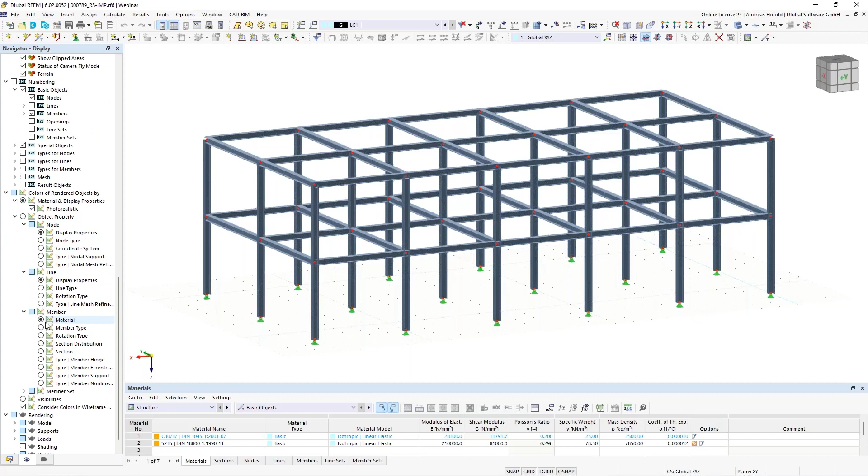I can show you the navigator display. You can use different settings here, for example members according to member type, section, and so on, and you can see there's the same color for all the same cross sections.

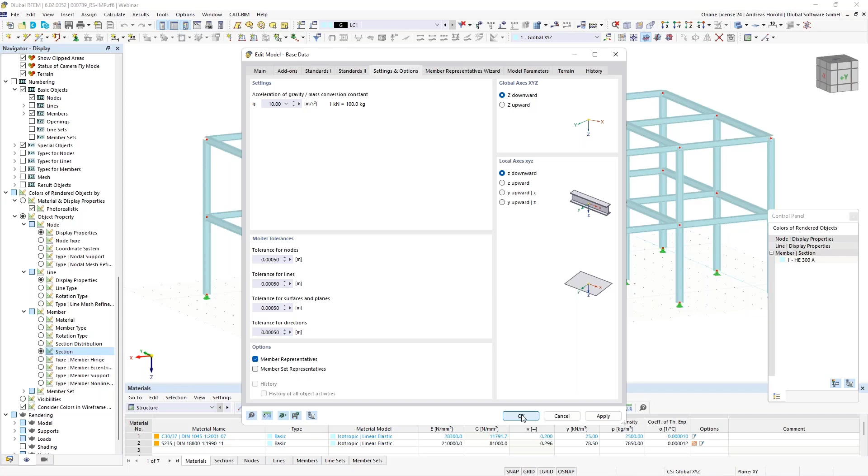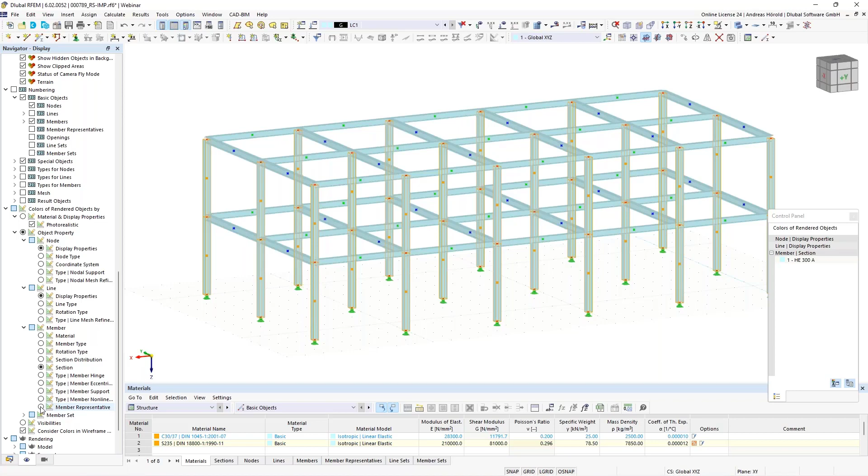I would like to show you two possibilities to display the columns and longitudinal beams and so on with different colors. First, I start here, top left, with the base data, go to Settings and Options, and activate the member representatives. Now you can see the different member representatives, for instance the cross beams, longitudinal beams, and columns, and you can select them here in the navigator display on the left side under member representatives.

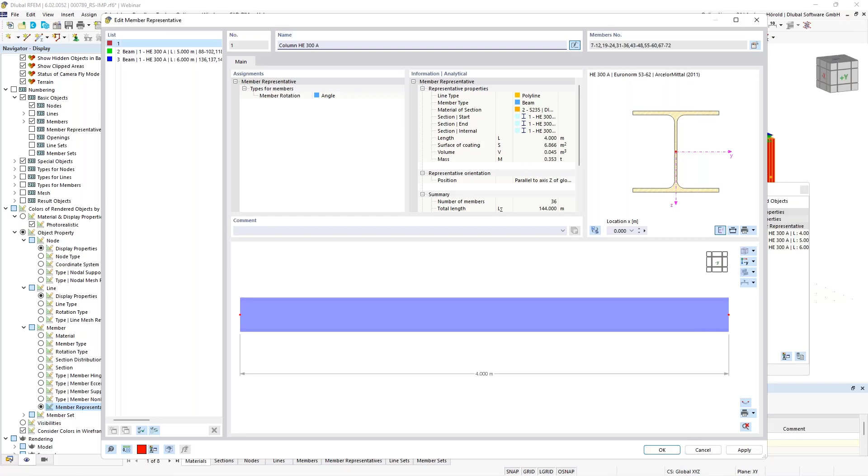Now the columns and so on are shown with different colors. It's also possible to rename them. If I click on such a member representative, I can edit the name here, for example I call it Column HE300A. I could do that for all of them. So that's one possibility, but the disadvantage is...

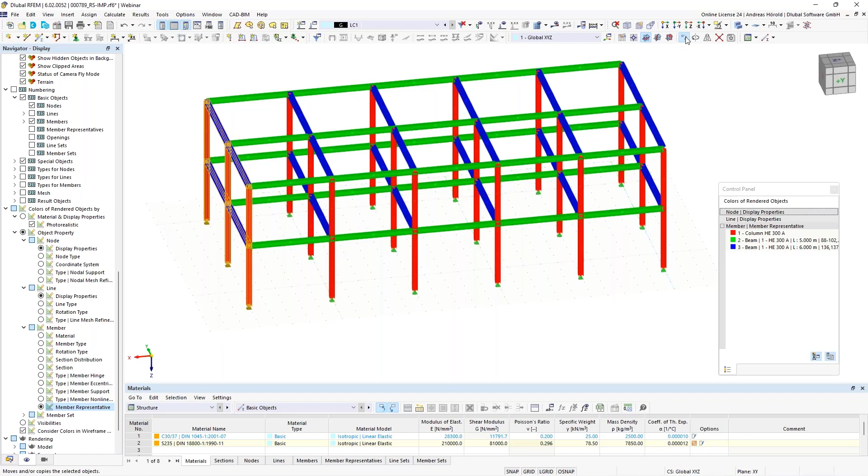It works now because all the members have different lengths. But for example, when I select those here and move them 1 meter in the X direction, then you can see those members have the same length, and that's why that option doesn't work anymore.

I switch off the member representatives. I can also deselect it here under member representative, so the dots are also undisplayed. So, next possibility.

I create selections, object selections. With a right click here in the navigator data, I select New Object Selection. First, I select the members that are parallel to a certain member, I select one member, and I call it Column.

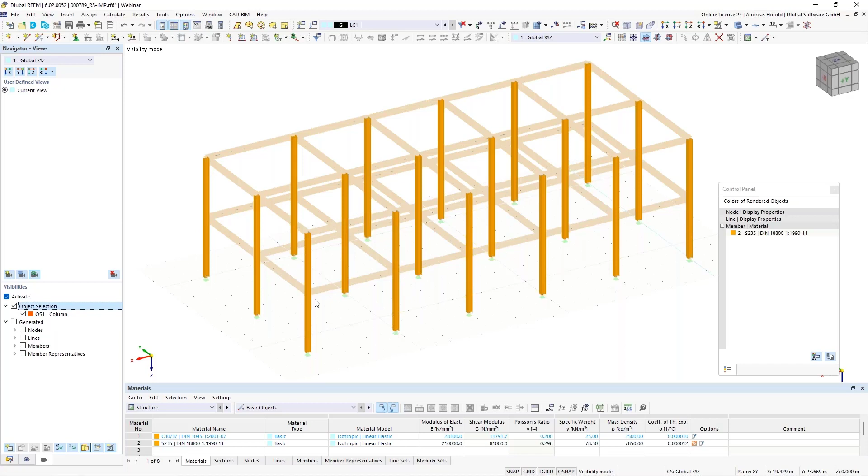How can I display it? So, for example, that's the first selection, and you can see it also in the navigator views. So we continue with the next object selection.

I have to activate all again. So, new object selection, same workflow, members that are parallel to this member, for example, and I call it Longitudinal Beam.

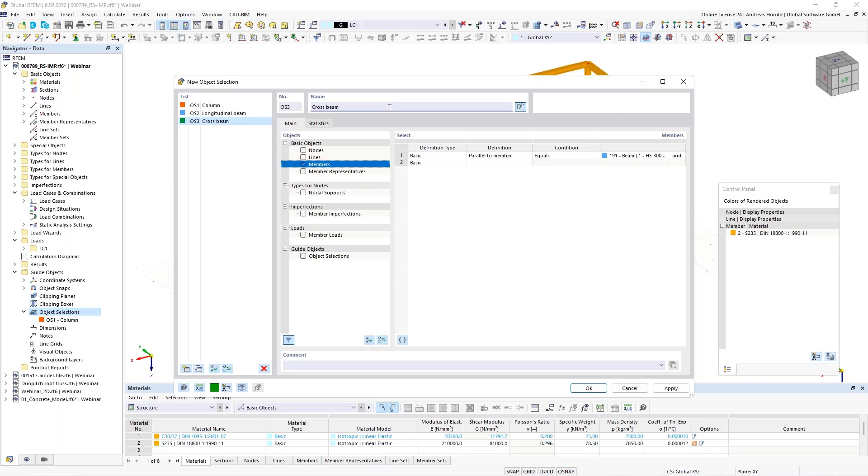Next selection, again members that are parallel to this member, and I call it Cross Beam.

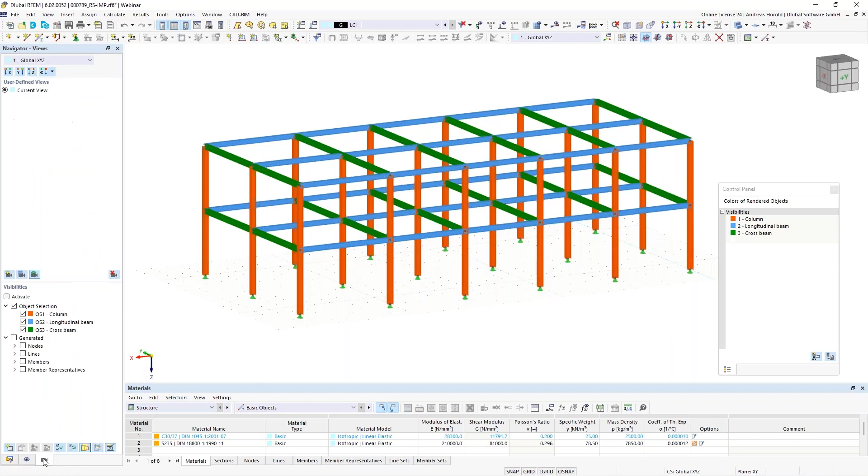So now you can switch to the navigator display, scroll down and check visibilities, and now all the members are shown with different colors. The next advantage is you've got the views, the certain views, you can activate, for example, columns, longitudinal beams, cross beams, and so on.

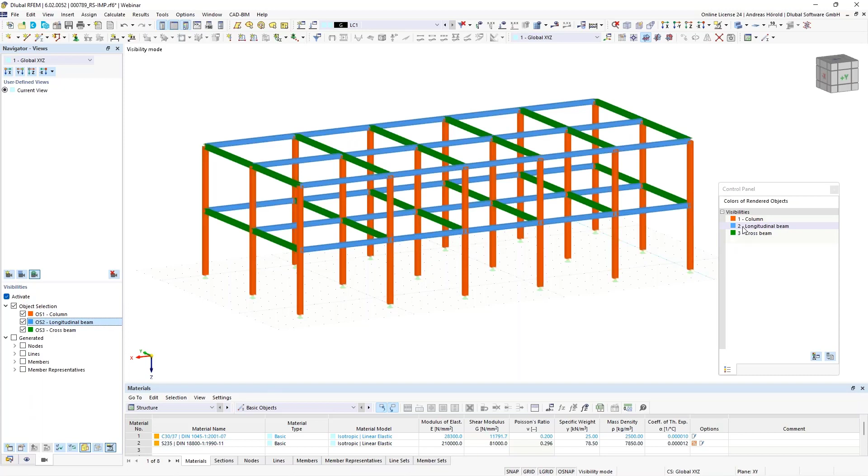And you can also change the color if you want, for example to yellow. I think it's a nice solution - you've got the views in the navigator views and the colors in the rendering according to the visibilities.

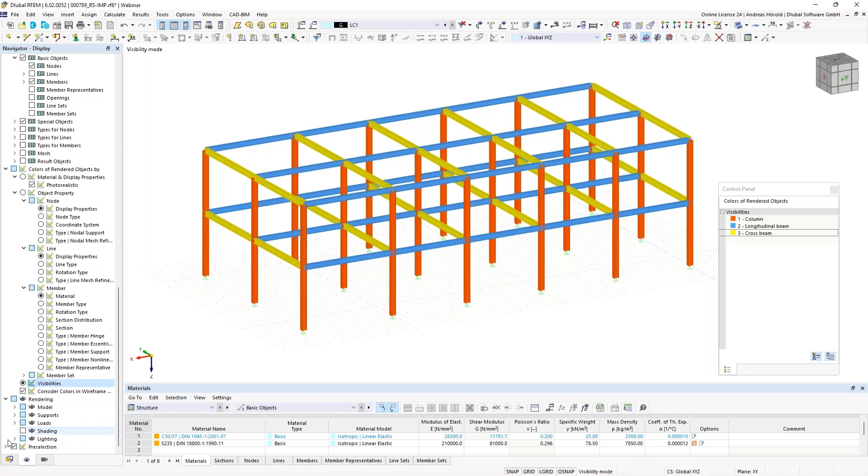Okay, that's all for this question. We turn to the next model, such a small steel hall, because the question is: where can I activate the lack of correlation in the load wizard of RSTAB 9 and RFEM 6?

Now you can see this building with small height and so on. If the wind load for buildings or structures is to be determined by the simultaneous assumption of aerodynamic pressure and suction coefficients on the windward and leeward sides of the building, the lack of correlation of the wind pressure on zones D and E of the wall surfaces may be taken into account. I would like to show that in an example.

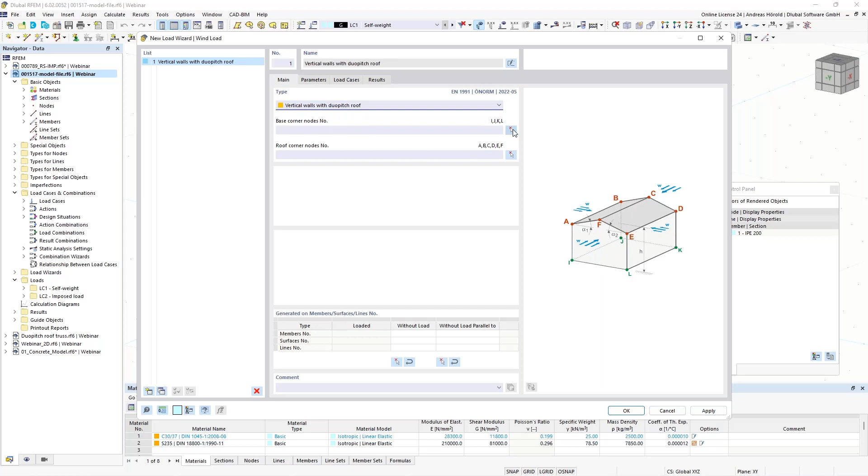I create a wind load. Here, top left, Insert, Load Wizards, Wind Load Wizard. Now I open the dialog box. First, I select vertical walls with duopitch roof, and I have to select the base corner nodes - that's quite easy for this model - and the roof corner nodes.

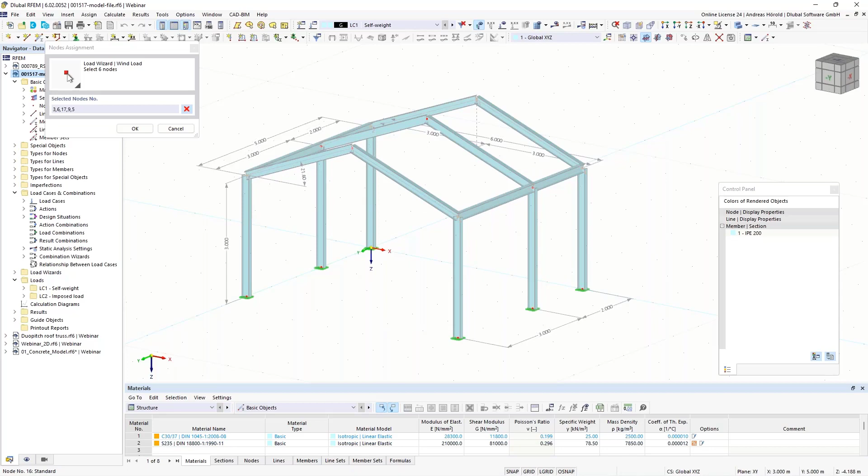Okay, so that's all. And then we turn to the parameters.

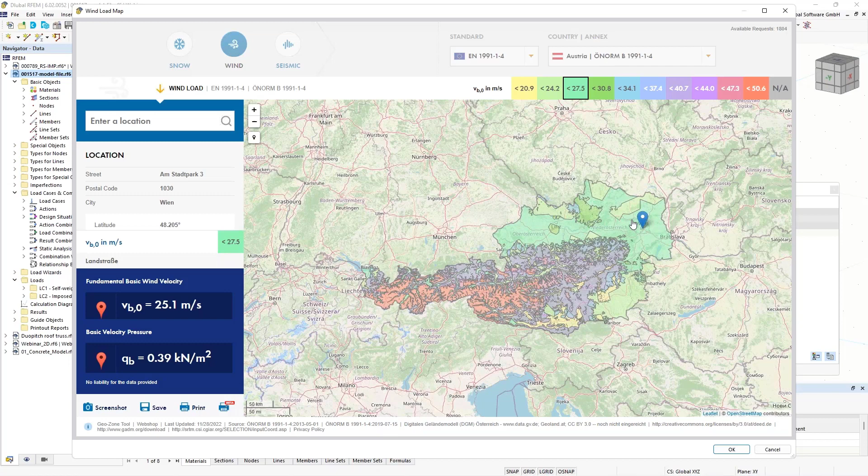I use the load maps and import the location. I selected the Eurocode and the national annex of Austria. Vienna is selected, I leave that for this example.

What is important to us is here at the bottom, the lack of correlation according to Eurocode. For buildings with an aspect ratio of height to width larger than 5, the resulting force is multiplied by 1. For buildings with a ratio of height to width smaller than 1, the resulting force may be multiplied by 0.85. Intermediate values are linearly interpolated.

So let's create a load case first, and then let's turn to the results. We take a look at zone D and E.

We remember the wind pressure and suction, 0.56 and 0.20. If I go back to the parameters and select the lack of correlation, then the loads should be decreased. You can see it was 0.56 and it's now smaller, and also the minus wind pressure on zone E.

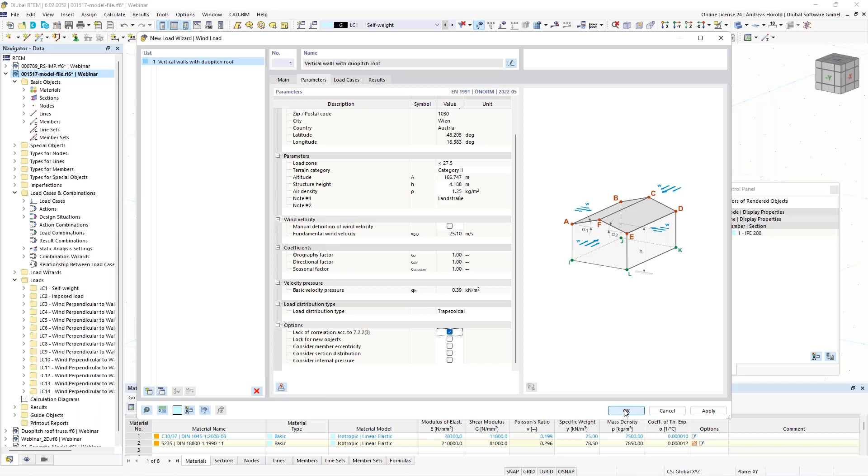Okay, then we turn to the next question. Rfem 6 crashes directly after the program start - what can be the reason? Recently, the graphics card was mostly to blame for crashes occurring after the program start or extremely slow program reaction.

I would like to show the website - dlubal.com - you can search for the certain FAQ under support, learning and FAQs, but I also added it to our news and events, webinars section. That's today's webinar. You will get an email in the next days when the recording is online. The recording will be here, and the email contains a link to that page. Please scroll down, you will find all the models and the FAQ that I meant.

Just read the FAQ. We recommend graphic cards from NVIDIA or AMD, and we strongly advise not to use an integrated GPU, as there are often problems due to the drivers. For example, notebooks are often equipped with 2 graphic chips, such as mine - I have got an NVIDIA graphic card.

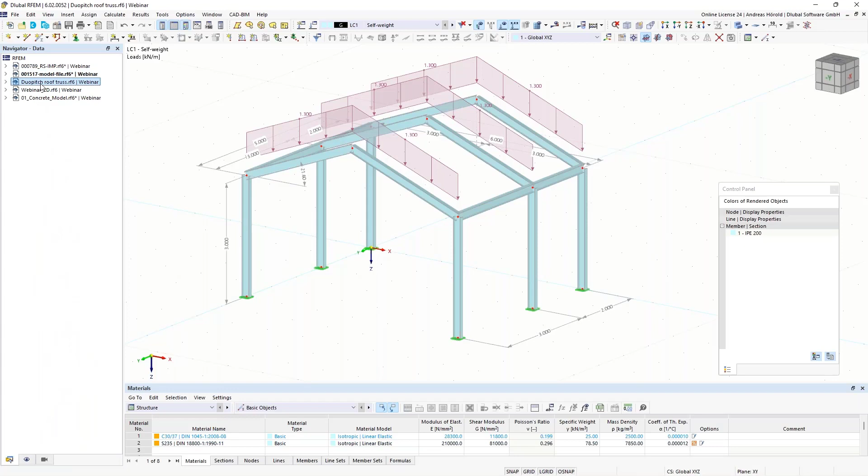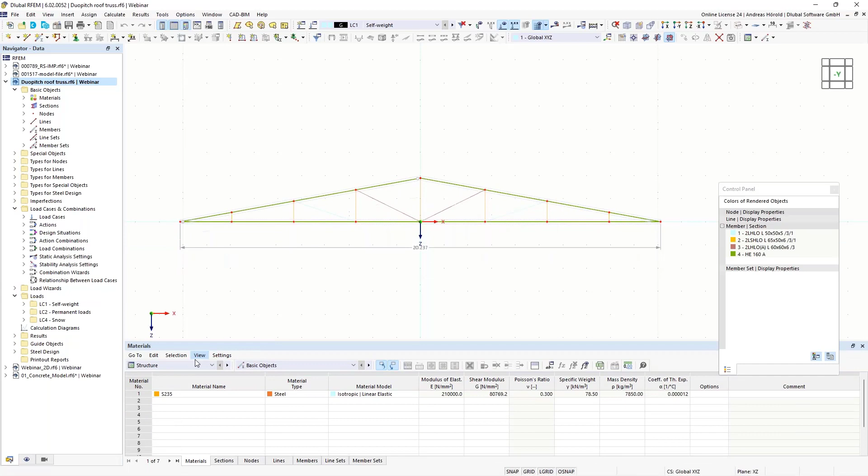So the next question is: it is not possible to design double angles for my model using the steel design add-on. Every time I try it, the program shows information about the invalid section shape. Okay, let's do the steel design - okay, you can see the error message.

You can see that member is not designable because of the invalid section shape for the design. So I can select the two members, then go to members, edit, and I can edit the section.

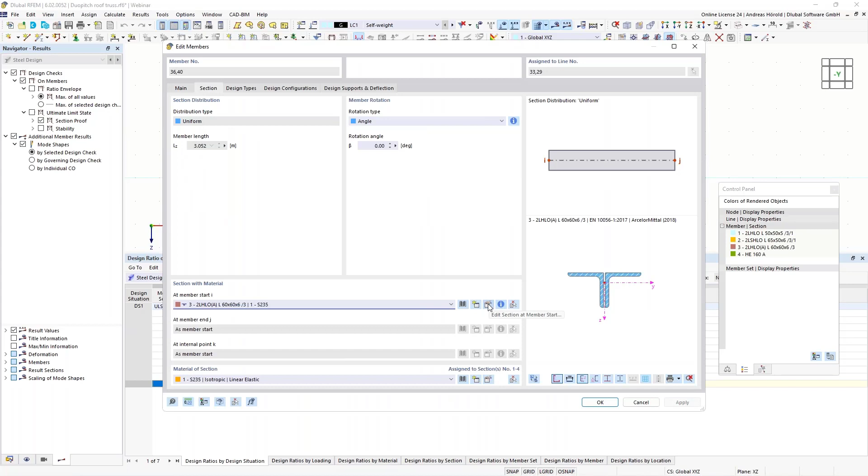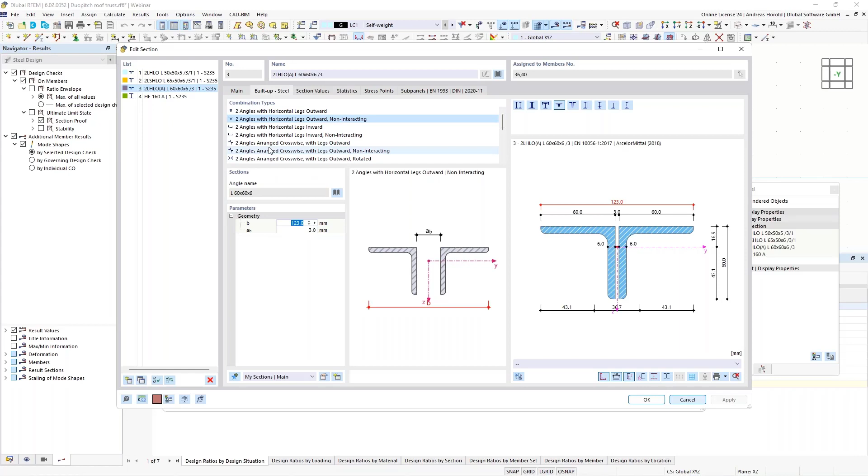So, it's a built-up steel section, and the design is not possible for the non-interacting combination type, that one. But a cross-section without this property can be designed by the add-on, for example this one. Now you can see the shear - the interaction of members can be affected in RFEM by the t* value. It's taken into account when calculating the shear areas and depends on the formation of the bracings.

I leave one here. I select new section, L 60 by 60 by 6. Okay, 123 - okay, that's all, that should be sufficient.

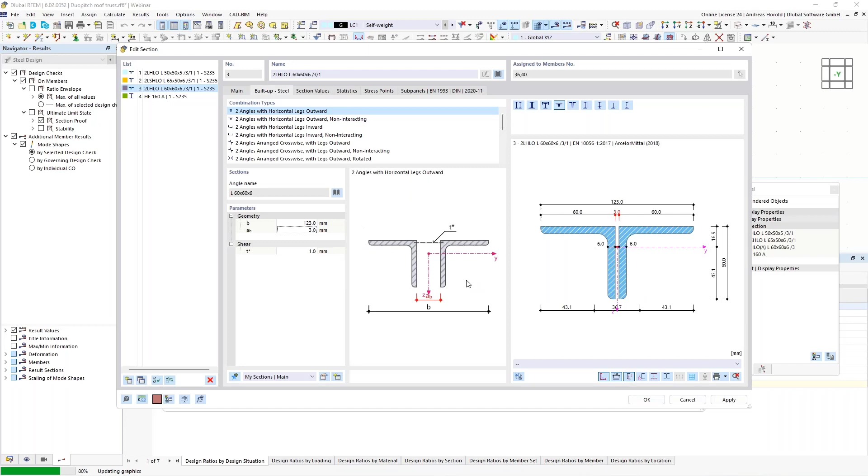I start the steel design again, and now it should work.

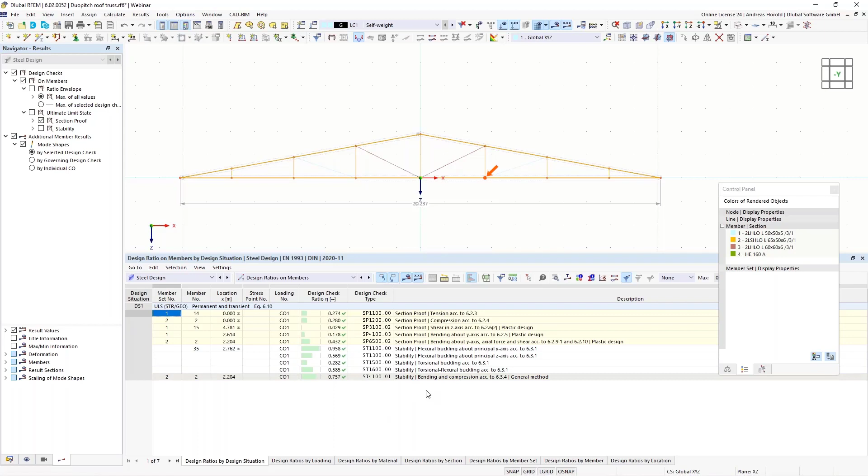Okay, now we can see the stability design. We don't get any error message, and that's why it works now, because of our changing of the cross section.

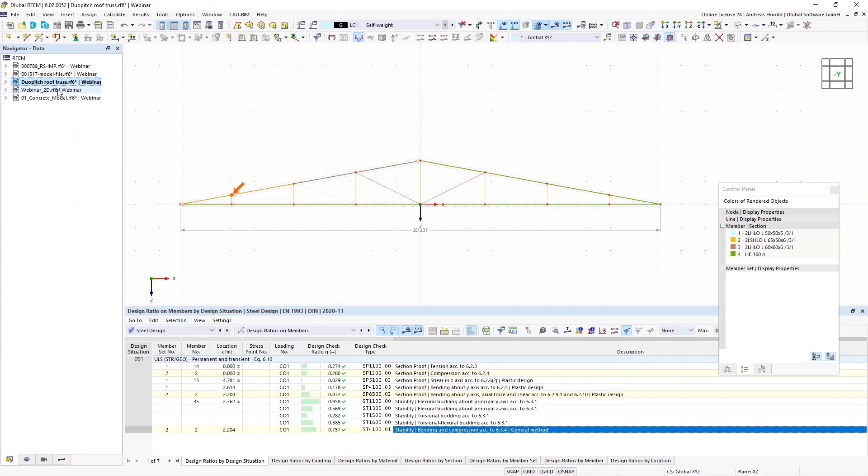Okay, then we turn to the next model and the next question. Next question is, is it possible to display the sum of forces on a line hinge for the dimensioning of fasteners later?

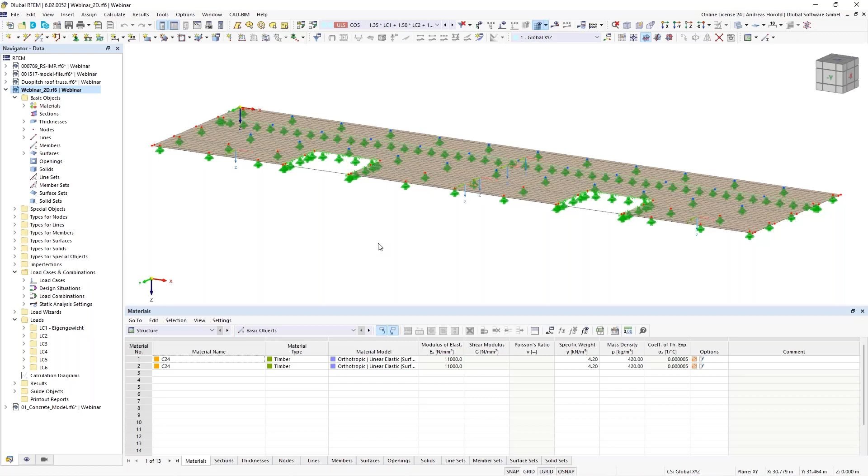Yes, that's possible. With regard to the dimensioning and choice of fasteners to be applied between the two surfaces, it's useful to know the resulting forces or moments between these surfaces. We have got a line hinge here, we can double click on it.

There are springs, a very small spring around the x-axis and a higher spring constant for the translation in x and y direction.

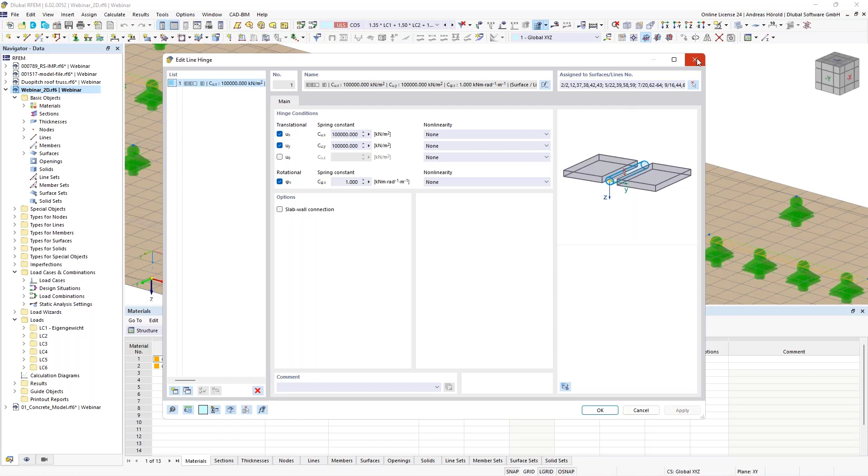So if you want to see the results, we can do a right click and then turn to the result diagram. Then you have to search, you have to scroll down, it's quite at the bottom. And then you see the releases here, line hinges, and the forces.

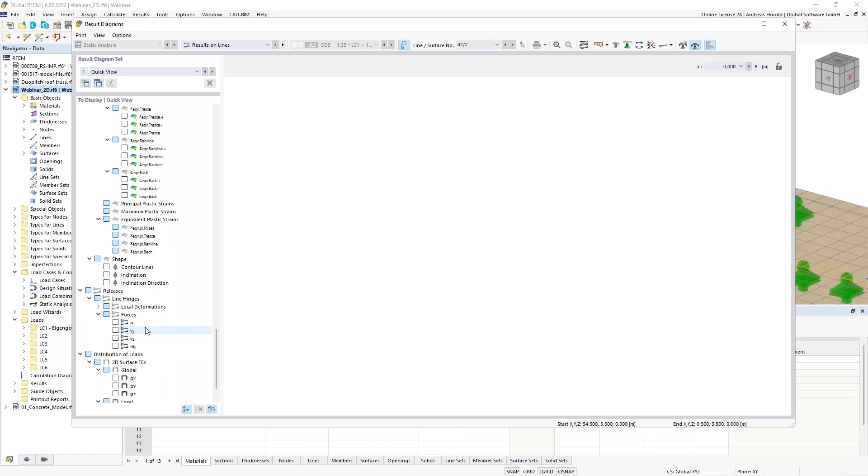So what's interesting to us is vz, and it is 0. Then right above, with that button, you can edit smooth ranges of the result diagrams. Just click on it and you can enter certain areas, for example, from 0 to 5, 5 to 10, and 10 to 15.

And if you take a look on the right side, under results, it's automatically selected that we want to display or smooth the releases and forces vz.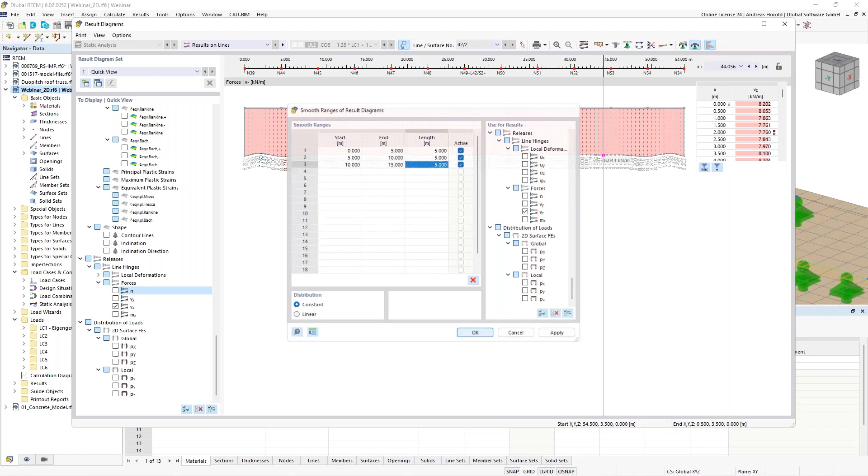Now you can see the sum of that area here, of the 5 meters, about 40 kilonewton. That's quite similar for our fields here or for our areas. And the average is about 8.1 kilonewton per meter. That would be the value for the dimensioning of your fastener.

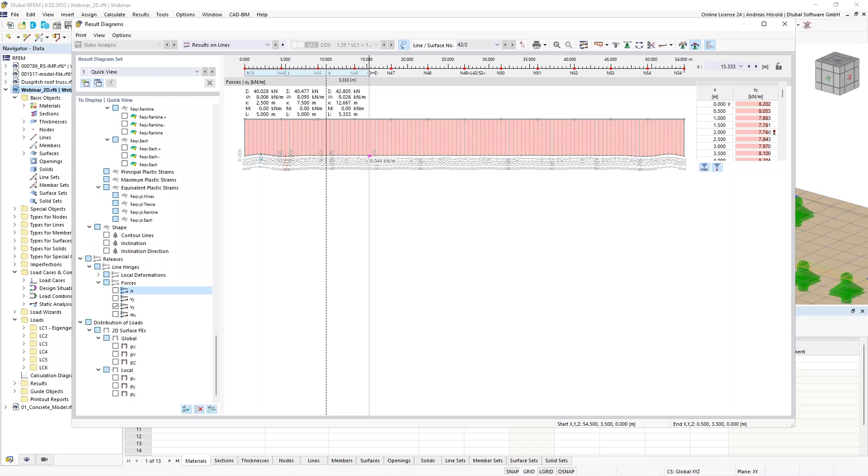You can also modify the area. You can extend it, for example, and you can see the average is nearly the same over the length of the line hinge.

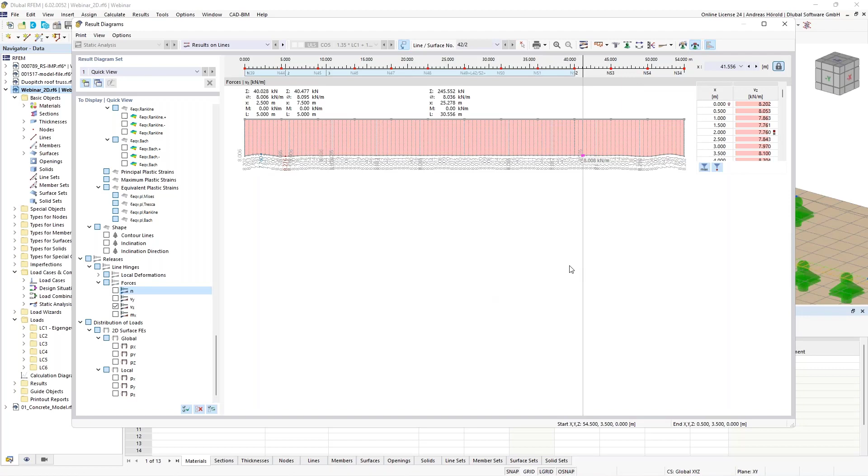It's also possible to print that directly to the printer, to the printout report, to a PDF, to the clipboard, or to a file. A file would be a PNG or JPG file. That would be possible. Okay, that should be all to that question.

Then we turn to the last model and the last question. It's about concrete design. And the question is, when modeling and calculating downstand beams made of reinforced concrete in RFEM 6, is it recommended to always create member sets?

I have to say yes. At least if there are 2 or more members that act as a continuous member, then I would say modeling with member sets is recommended. We did it in that example because this is the only way to consistently determine the reinforcement for the entire structure components. It's an advantage, especially for the calculation of the anchoring lengths.

Now we've got ribs here, and for ribs, the effective width is not determined along the complete member set. In that example, one member was defined for each span. For example, we can double click on it.

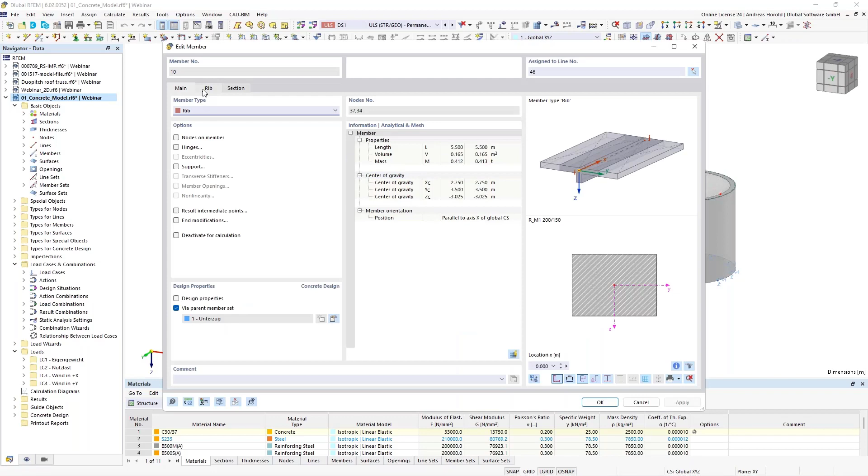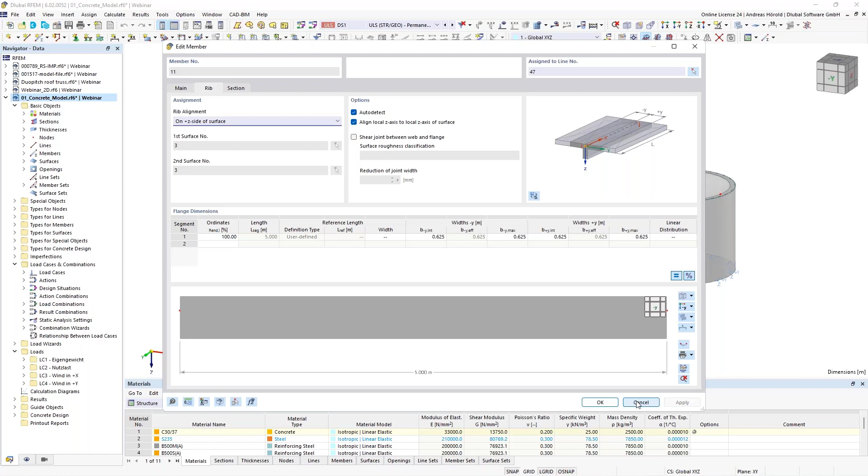You can see the rib, and you can see the flange dimension is 69 centimeters for that beam, and for that beam or for that rib, it is 62 or 62.5 centimeters, because of the different span of the beam.

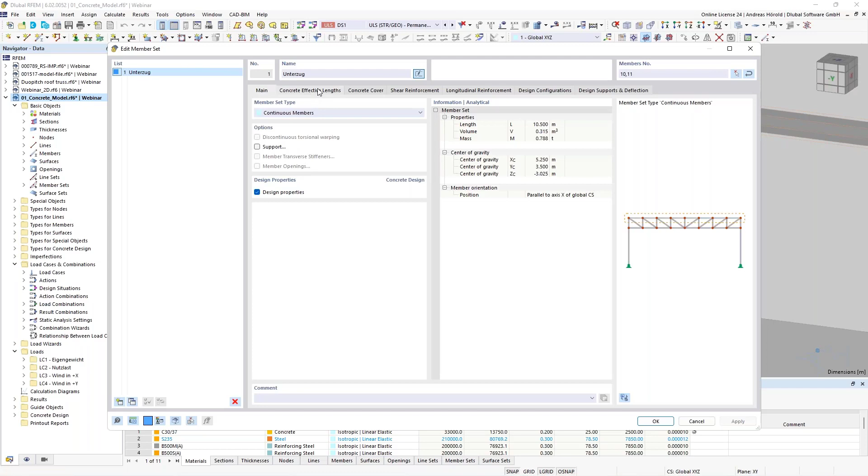Yeah, and if I click on the member set here on the pointed line, then you can open that dialog. You can select the concrete effective length, concrete cover, the concrete durability, for that example it is XC1, as a nice graphic. It's dry or permanently wet in our example.

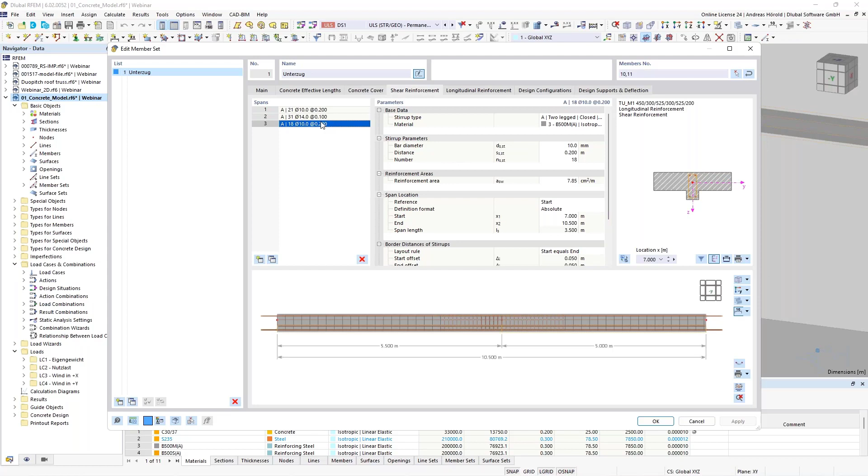Then the shear reinforcement. It's possible to define several reinforcement areas without effort on the member sets. This way the shear reinforcement can be quickly defined, for example above the center walls, in the middle, by smaller spacings or different rebar diameter. You can see the spacing is 10 centimeters and the diameter is 14 in that area here.

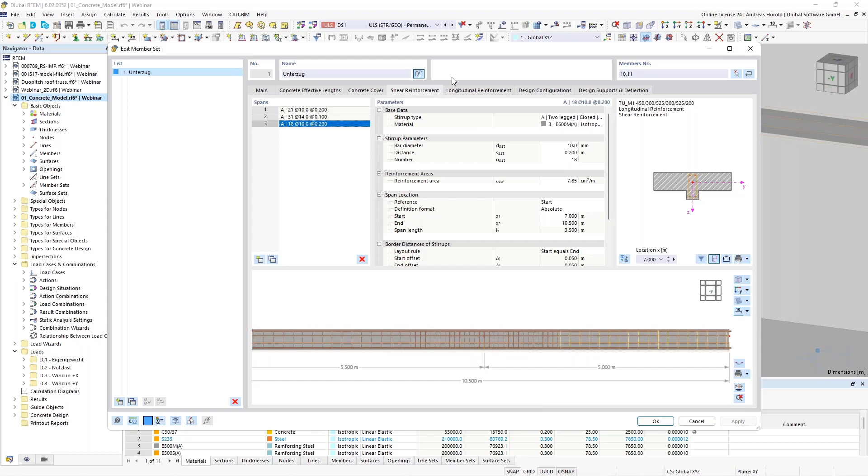And here we have a larger span or distance between the stirrups also here. So then the longitudinal reinforcement is continuous, also over the supporting here. Then you can see the anchoring lengths and so on.

Okay, and it would be also possible to design supports for the deflection analysis.

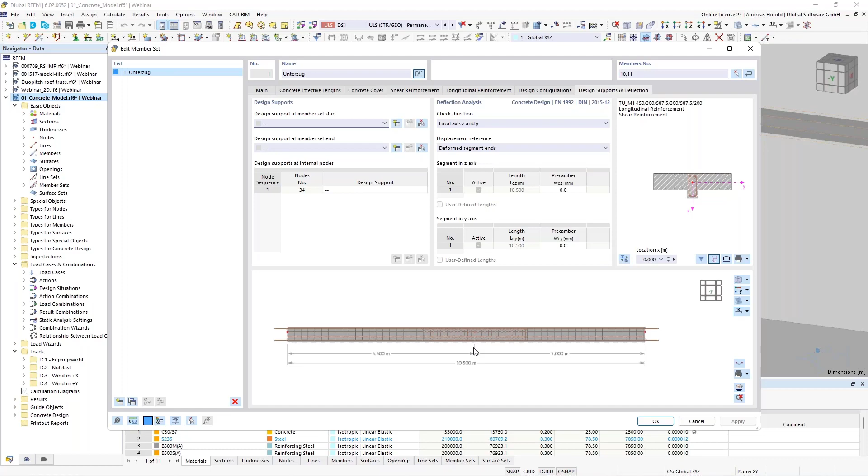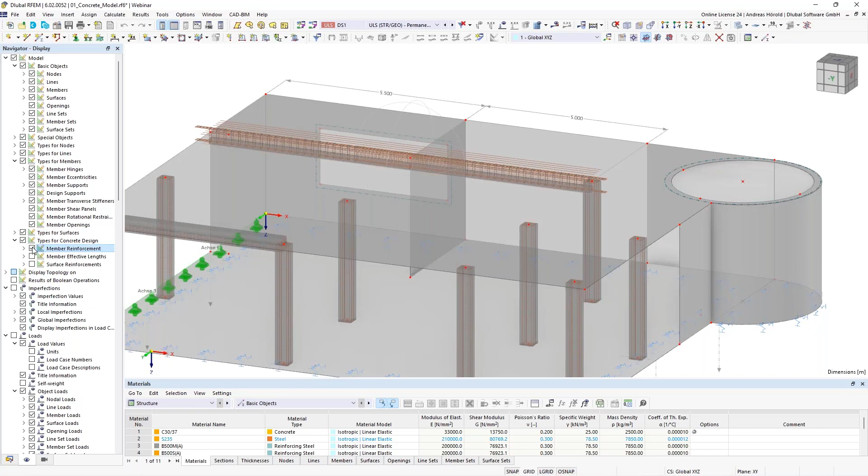And if I applied it, I can also let the program display the reinforcement. In the navigator display, you can search for the type for concrete design, the member reinforcement, and the surface reinforcement. And that's the reinforcement of the member set that we recommend to define.